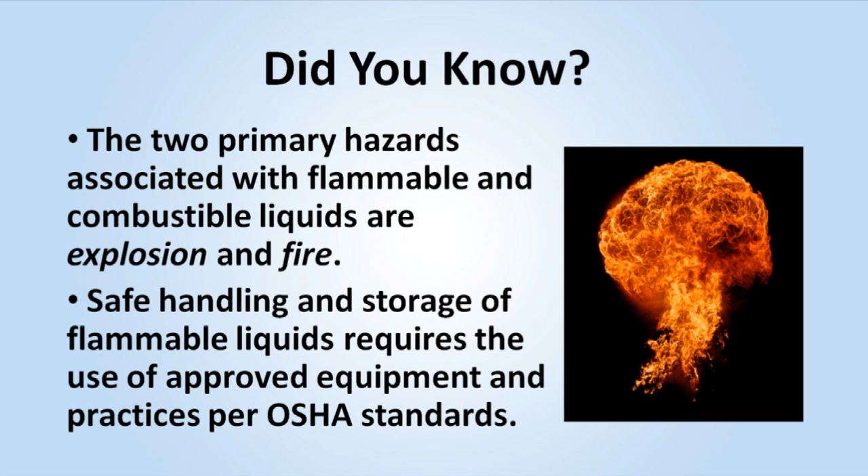Employers are responsible for providing a work environment that allows the safe handling and storage of flammable and combustible liquids. Employees are responsible for the safe handling and storage of these liquids and completing the required training.

Flash point means the minimum temperature at which a liquid gives off enough vapor to form an ignitable mixture. In general, the lower the flash point, the greater the hazard.

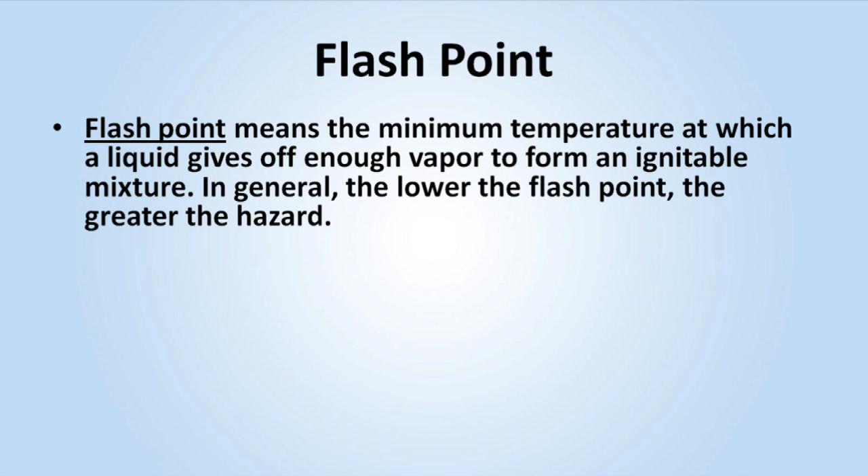Flammable and combustible liquids are classified primarily according to their flash point to indicate the danger they pose as a fire hazard. Flash point is directly related to a liquid's ability to generate vapor. Since it is the vapor of a liquid, not the liquid itself, that burns, vapor generation becomes a primary factor in determining the fire hazard.

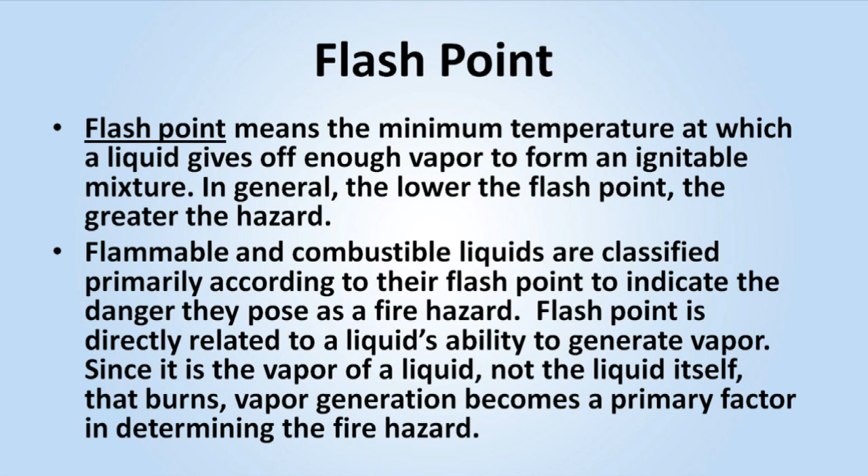Flammable liquids have flash points below 100 degrees Fahrenheit and are more dangerous than combustible liquids since they may be ignited at room temperature. Flammable liquids themselves will not burn, but as the liquid evaporates, it gives off vapors that mix with the air to form dangerous gases that can be set off by a small spark.

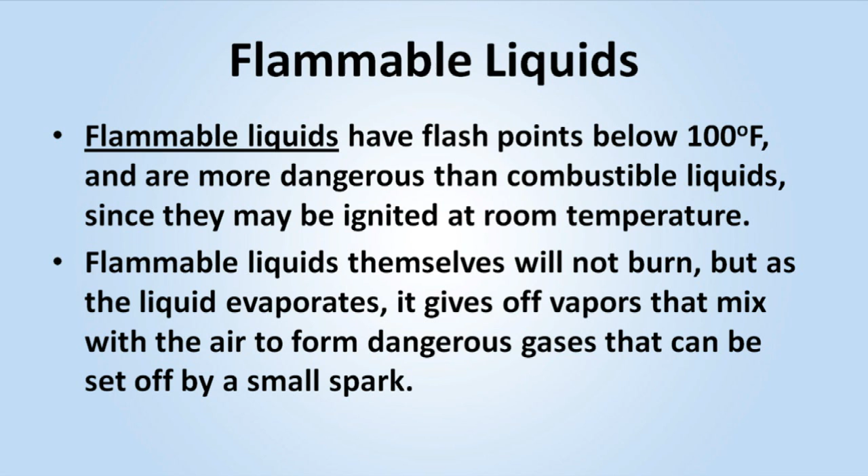Gasoline, for example, evaporates at temperatures as low as 45 degrees Fahrenheit below zero. As the temperature rises, the rate of evaporation increases and more vapors are given off. Flammable vapors are usually heavier than air, so they collect in the lowest areas they can reach. Without good ventilation to dissipate them, a small spark can set off a big disaster.

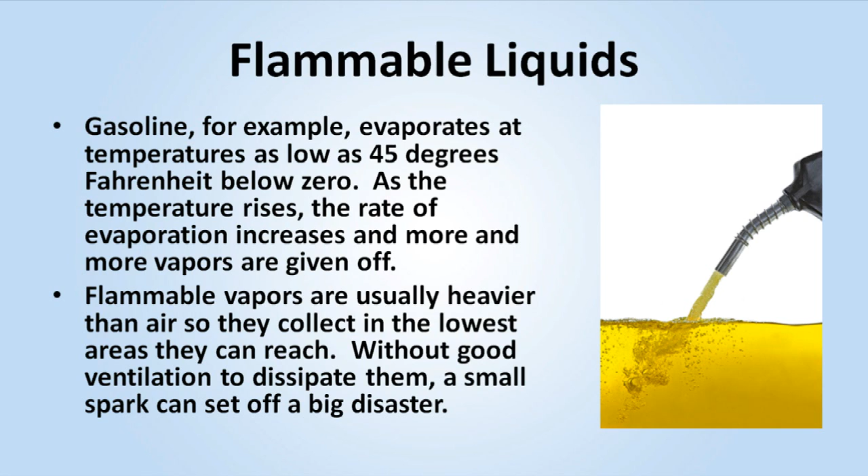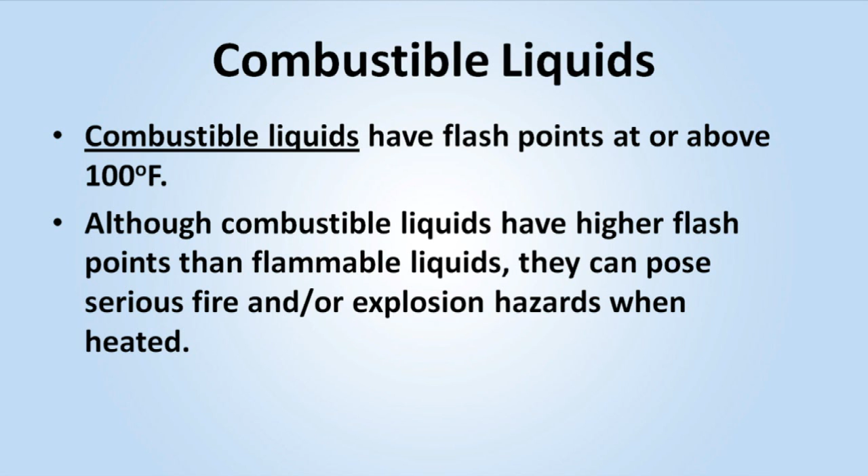Combustible liquids have flash points at or above 100 degrees Fahrenheit. Although combustible liquids have higher flash points than flammable liquids, they can pose serious fire and/or explosion hazards when heated.

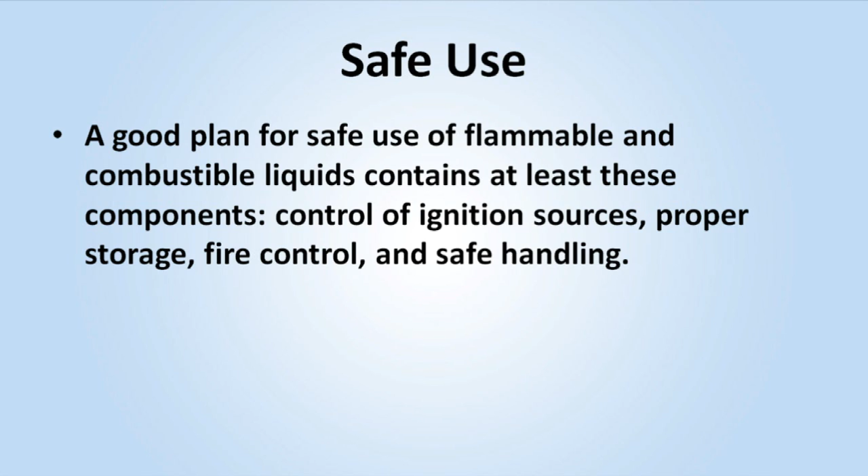A good plan for safe use of flammable and combustible liquids contains at least these components: control of ignition sources, proper storage, fire control, and safe handling. The employer and employees must take adequate precautions to prevent ignition of flammable vapors. Some sources of ignition include open flames, smoking, static electricity, cutting and welding, hot surfaces, electrical and mechanical sparks, and lightning.

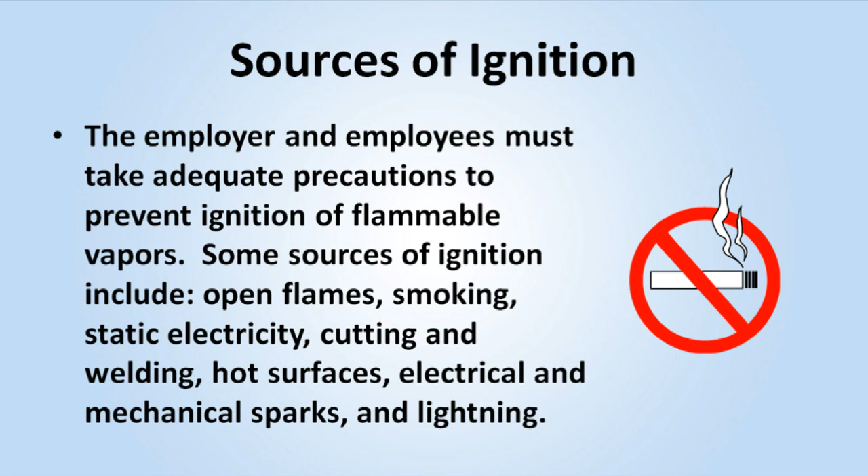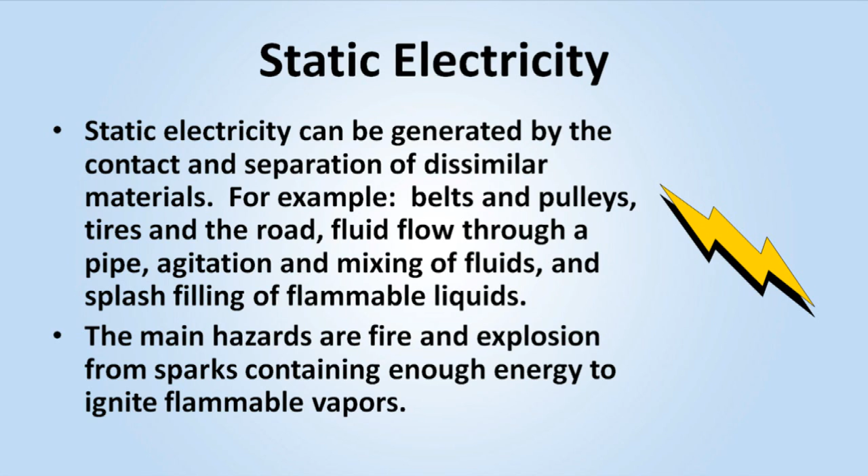Static electricity can be generated by the contact and separation of dissimilar materials, for example, belts and pulleys, tires and the road, fluid flow through a pipe, agitation and mixing of fluids, and splash filling of flammable liquids. The main hazards are fire and explosion from sparks containing enough energy to ignite flammable vapors. Bonding or grounding of flammable liquid containers is necessary to prevent static electricity from causing a spark.

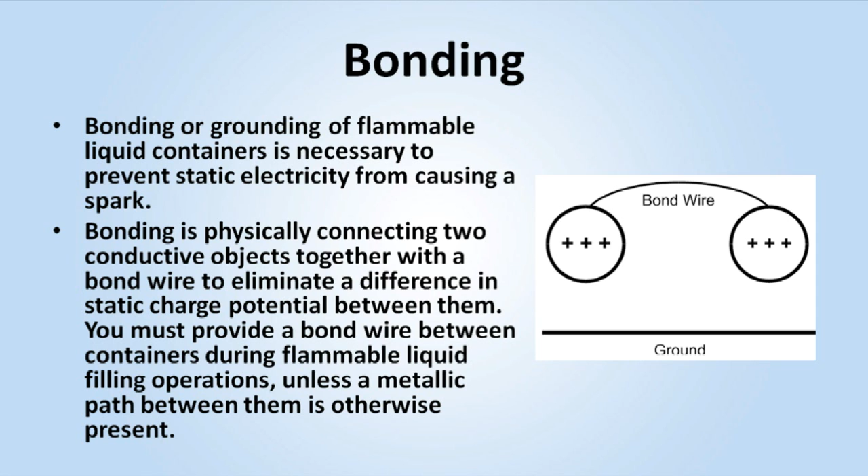Bonding is physically connecting two conductive objects together with a bond wire to eliminate a difference in static charge potential between them. You must provide a bond wire between containers during flammable liquid filling operations, unless a metallic path between them is otherwise present.

Grounding eliminates a difference in static charge potential between conductive objects and the ground. Although bonding will eliminate a difference in potential between objects, it will not eliminate a difference in potential between these objects and Earth, unless one of the objects is connected to Earth with a ground wire. Always provide adequate ventilation to reduce the potential for ignition of flammable vapors.

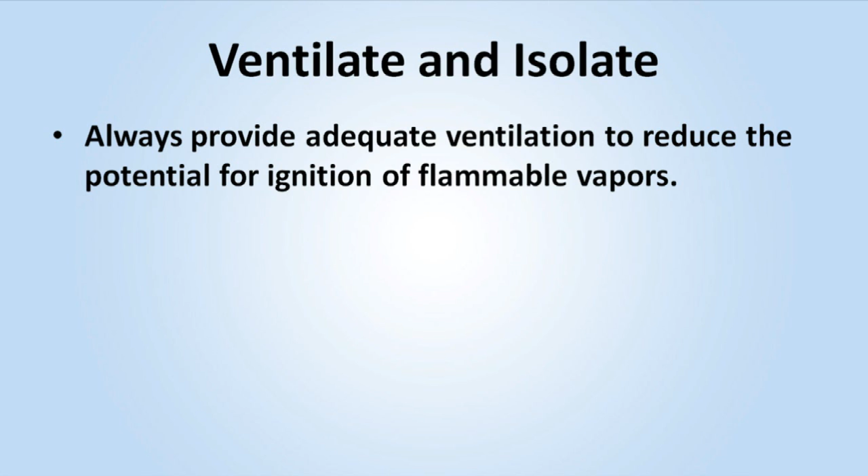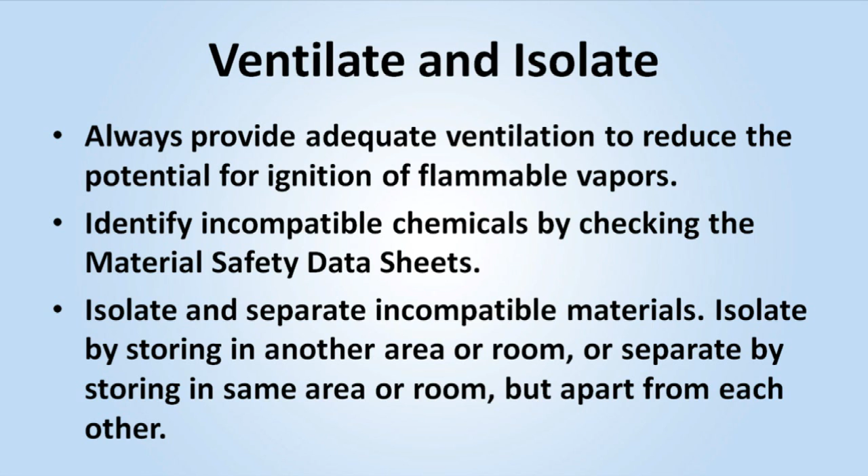Identify incompatible chemicals by checking the material safety data sheets. Isolate and separate incompatible materials. Isolate by storing in another area or room, or separate by storing in the same area or room but apart from each other. Storage of flammable or combustible materials must not limit the use of exits, stairways, or areas normally used for the safe entrance or exit of people.

Workers should use safety cans for storage and transfer of flammable or combustible materials when appropriate. A safety can is an approved container of not more than 5 gallons capacity with a spring-closing lid and spout cover, and safely relieves internal pressure when exposed to fire.

A flame arrestor screen prevents fire flashback into can contents. It's made with a double wire mesh, and the large surface area provides rapid dissipation of heat from fire, so that vapor temperature inside the can remains below ignition point.

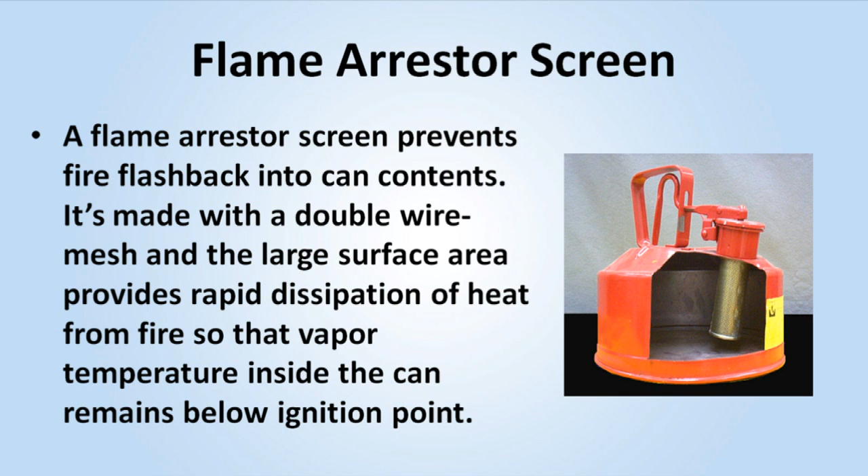Employers should use metal storage cabinets to store flammable and combustible liquids when appropriate. The cabinets must be labeled "Flammable, keep fire away." The doors on metal cabinets must have a 3-point lock, top, side, and bottom, and the door sill must be raised at least 2 inches above the bottom of the cabinet.

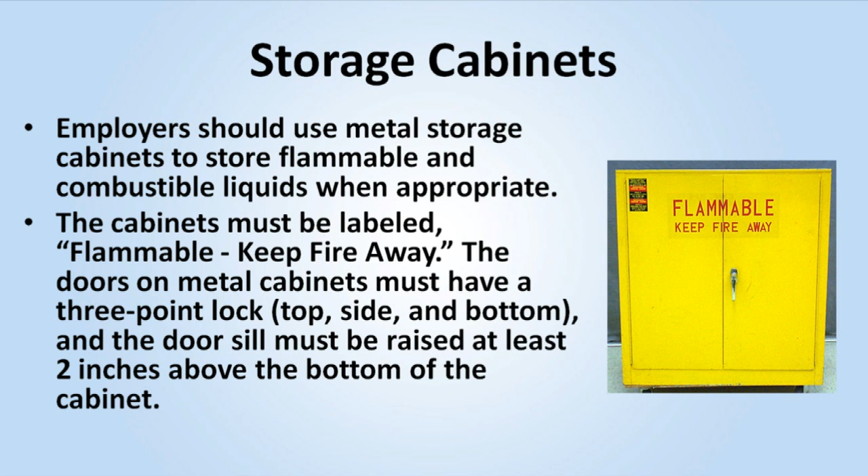Suitable fire control devices, such as small hose or portable fire extinguishers, must be available where flammable or combustible liquids are stored. Open flames and smoking must not be permitted in these storage areas. Materials which react with water must not be stored in the same room with flammable or combustible liquids.

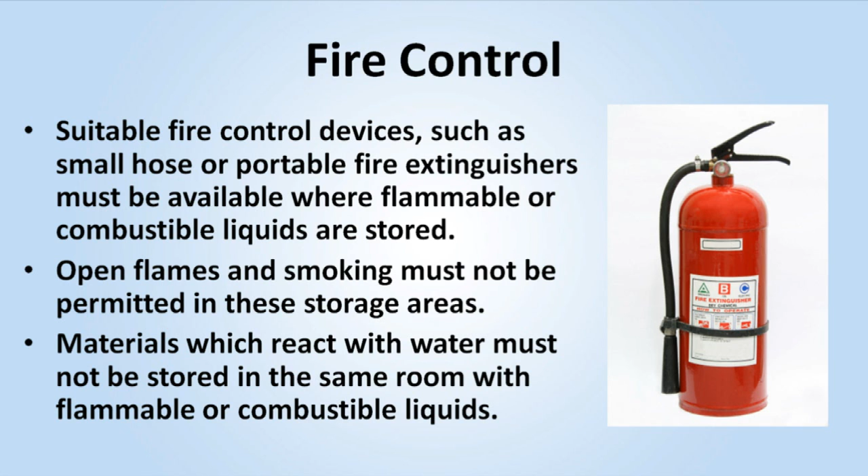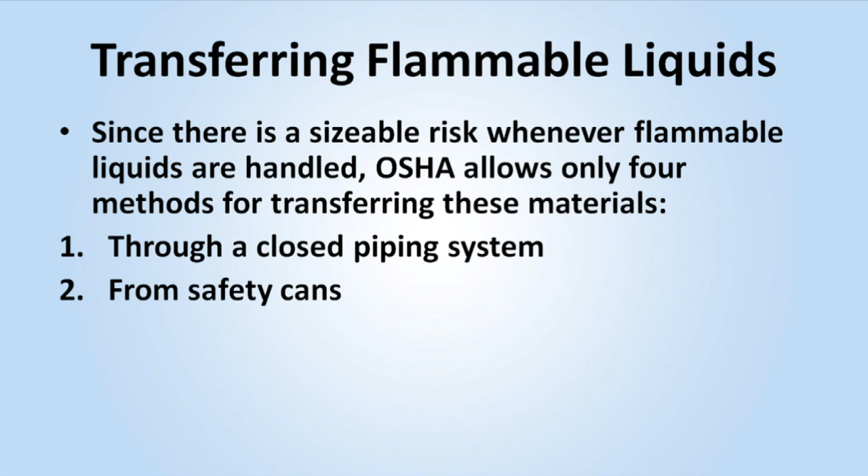Since there is a sizable risk whenever flammable liquids are handled, OSHA allows only 4 methods for transferring these materials: through a closed piping system, from safety cans, by gravity through an approved self-closing safety faucet, or by means of a safety pump. Combustible waste and residue must be kept to a minimum, stored in covered metal receptacles, and disposed of daily.

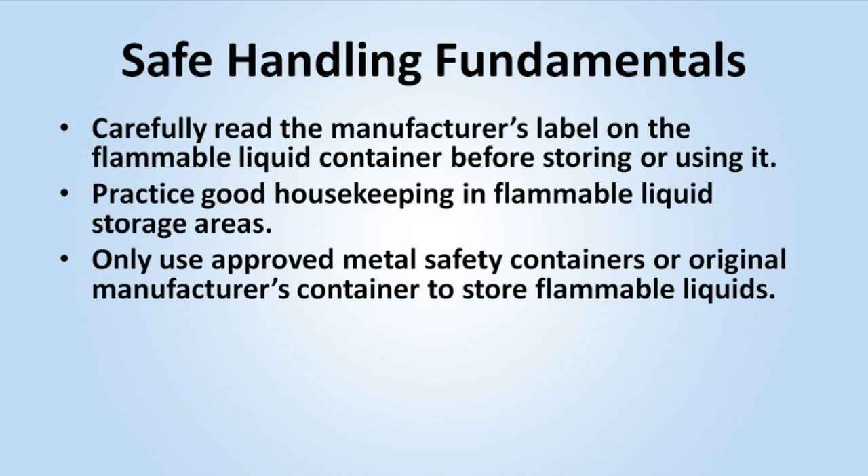Here are some safe handling fundamentals. Carefully read the manufacturer's label on the flammable liquid container before storing or using it. Practice good housekeeping in flammable liquid storage areas. Only use approved metal safety containers or the original manufacturer's container to store flammable liquids. Keep the containers closed when not in use and store away from exits or passageways.

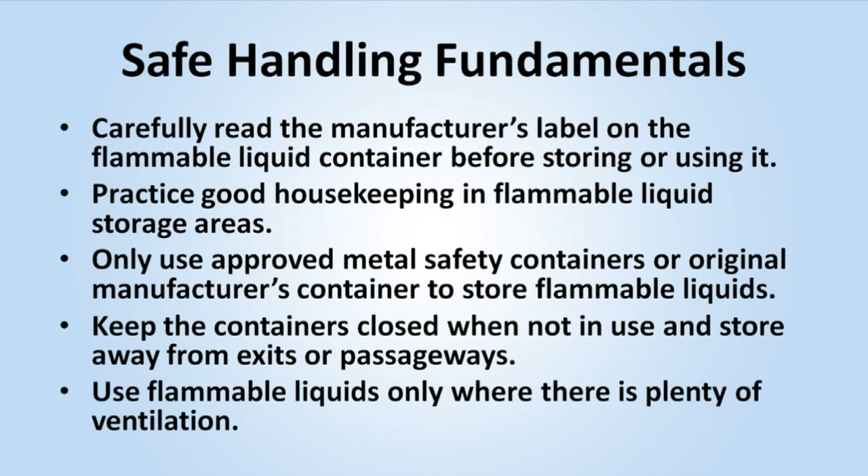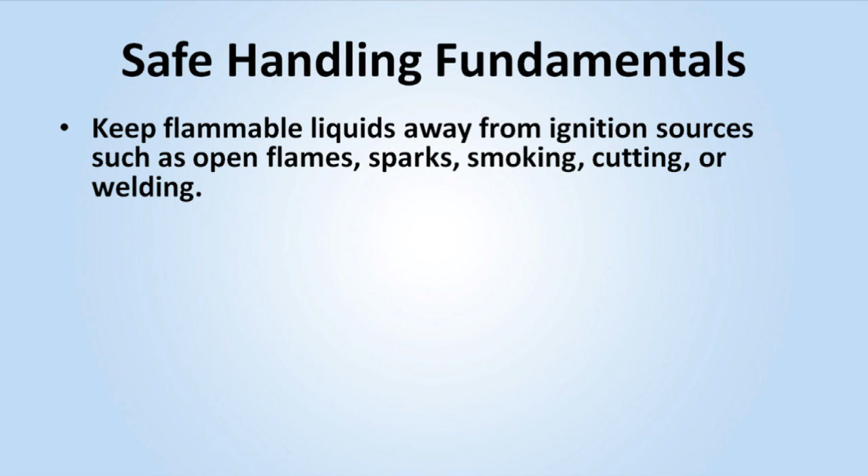Use flammable liquids only where there is plenty of ventilation. Keep flammable liquids away from ignition sources, such as open flames, sparks, smoking, cutting, or welding. Clean up spills immediately, then place the cleanup rags in a covered metal container.

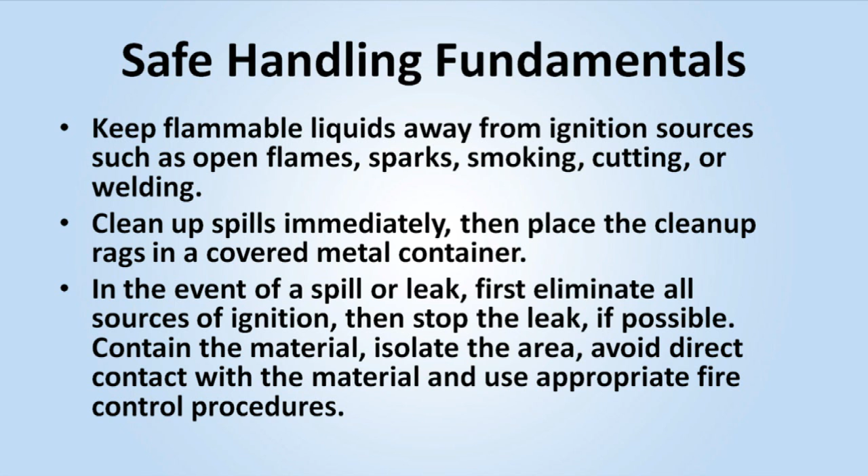In the event of a spill or leak, first eliminate all sources of ignition, then stop the leak if possible. Contain the material, isolate the area, avoid direct contact with the material, and use appropriate fire control procedures.

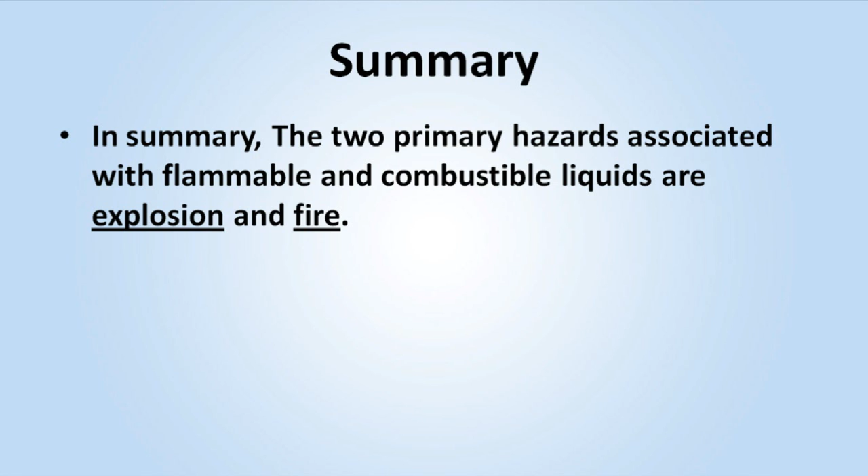In summary, the 2 primary hazards associated with flammable and combustible liquids are explosion and fire. Safe handling and storage of flammable liquids requires the use of approved equipment and practices per OSHA standards.